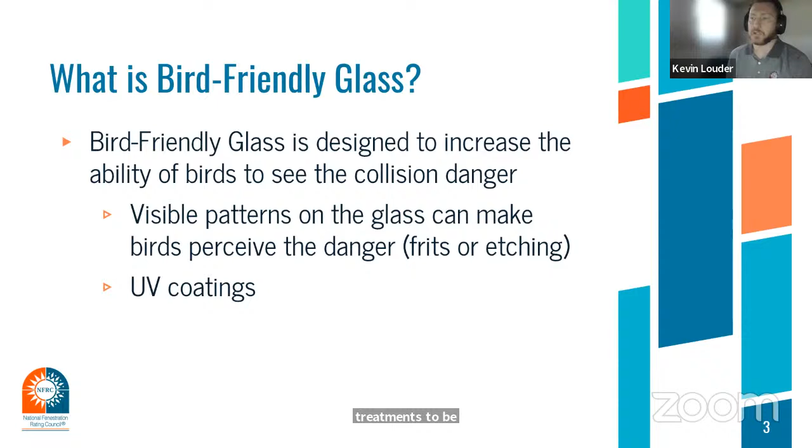As mentioned on the prior slide, patterns on the glass which birds perceive as not passable are avoided. Historical studies show that most birds will not attempt to fly between two horizontal lines that are less than 2 inches apart or between two vertical lines that are 4 inches apart. These studies focused on larger migratory birds, and smaller birds need tighter spacing, so 2x2 is becoming more popular, and I think this will be touched on later on in these presentations.

These objectives can be achieved using visible and invisible markings. Again, the invisible markings meaning UV applications. Common visible markings are created, again, using frit or etchings, obscuring the glass. Typically, the wider the lines or denser the patterns, the more effective they are.

For the UV markings applied to the glass, similar to the low-E process or other invisible or transparent coatings, the left-hand side shows what the bird sees. You can see that purplish hue with the striping. The right-hand side shows what the human eye can see. So the UV markings need to follow the 2x4 or 2x2 rules or other guidelines for visible markings to be the most effective.

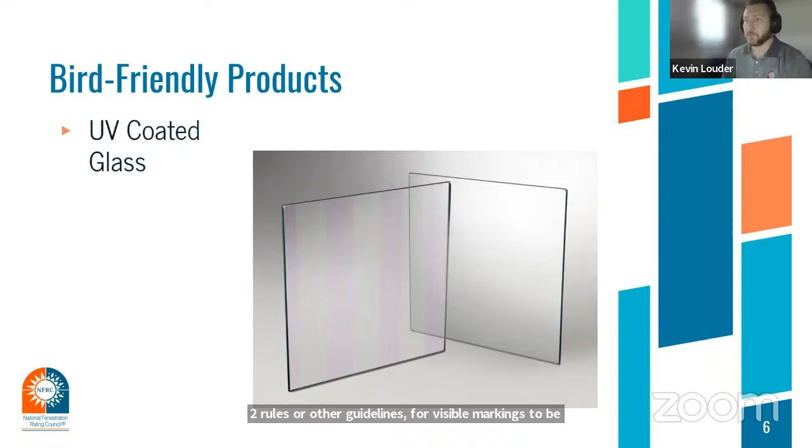The vast majority of glass is optically tested, measured, and added to what is called the International Glazing Database, which is managed by Lawrence Berkeley National Laboratory, also known as LBNL, and they incorporate that into their WINDOW software. This WINDOW software is used to assemble insulated glass units and calculate center-of-glass properties, which in turn is used for total product rating. In some cases, optical properties can't be measured directly, which requires the center-of-glass properties to be determined through other methods, which we'll talk about in the next slide.

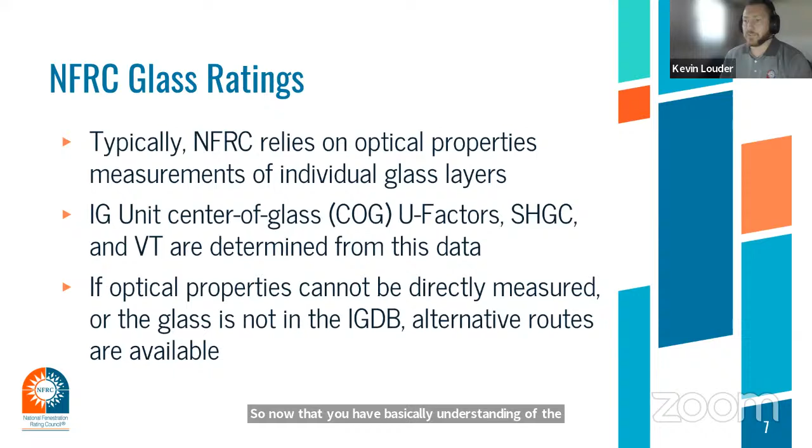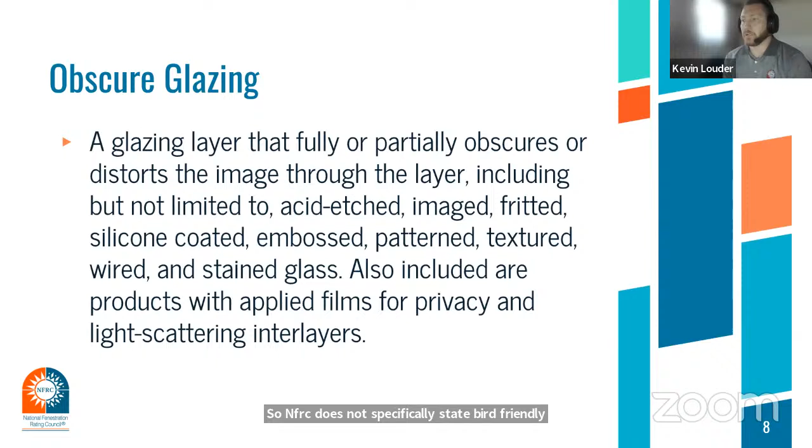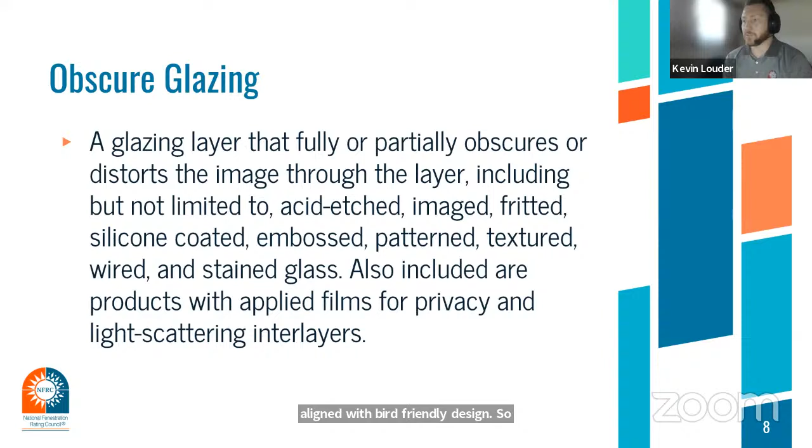So now that you have a basic understanding of the types of bird-friendly glass treatments and how NFRC rates glass, we can dive into how NFRC handles bird-friendly glazing. NFRC does not specifically state bird-friendly glazing, but visible patterns used would fall into an encompassing classification called obscure glazing. Some may also use the term diffuse glazing. As you can see in this NFRC definition, pulled from one of our technical documents, there are a variety of treatments covered and aligned with bird-friendly design. Now that we know these bird-friendly designs and glazing treatments are products and effects covered under the NFRC certification program, let me address the options that have been authorized for these glazing types.

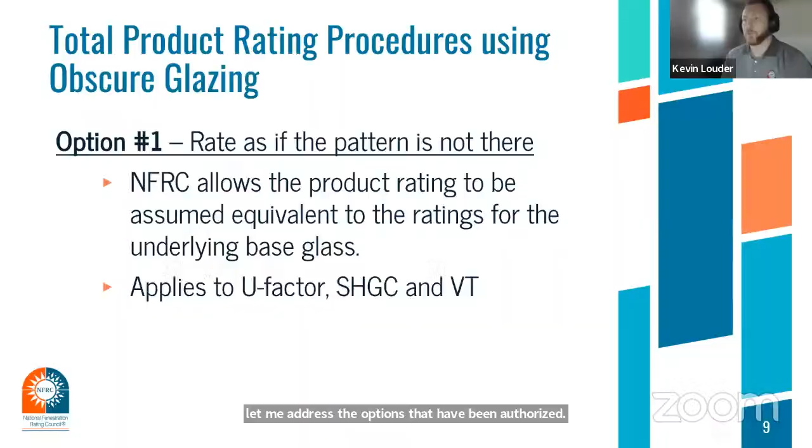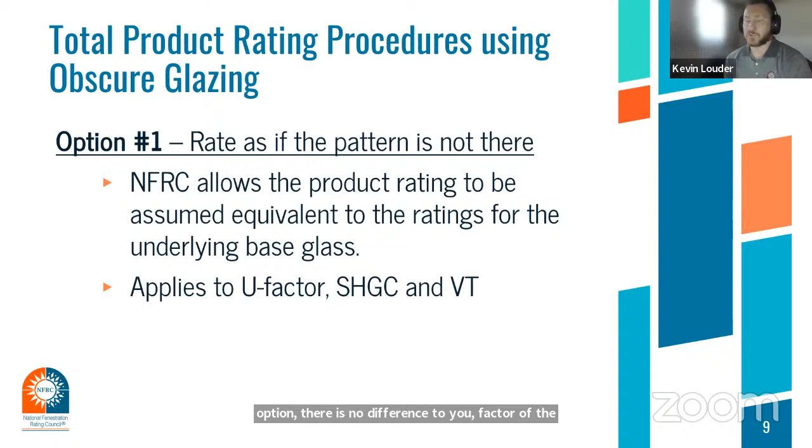Starting with the first option, it allows for the obscure treatment to be ignored, and the base glazing without the treatment can be used in the total product rating. This has been the path historically chosen, as it is the conservative approach. It's the easiest and most cost-effective path for the manufacturer. However, it's understood that the potential performance related to solar heating and VT due to the patterning is not captured when using this option. There is no difference to U-factor of the glazing with or without a tint, obscure, or diffuse treatment unless the treatment causes an emissivity change.

Moving on to option 2. This second option has not historically been widely chosen, primarily due to the cost to manufacture the samples and the time for testing, and it requires individual testing of all product configurations of interest.

Depending on the method selected, such as a total product test, meaning the entire glazing and framing complete product, this rating can only be used with that specific product configuration and glazing that was evaluated. Normally the glazing can be tested independently, which is desired and most cost-effective, and the results can be applied to any other framing. But again, all patterning configurations require independent tests.

So again, it can be very costly for the manufacturer to do physical testing. Since the U factor is equivalent with and without the obscure treatment, as noted in option 1, and physical testing for visible transmittance of pattern and frit glass is not available, typically only a solar heat gain test would be performed, which is our NFRC 201 test. If necessary, a U factor test could be performed, which is an NFRC 102 test, but that would only be completed if the product cannot be simulated. This incurs additional costs, which is not cost friendly for the manufacturer.

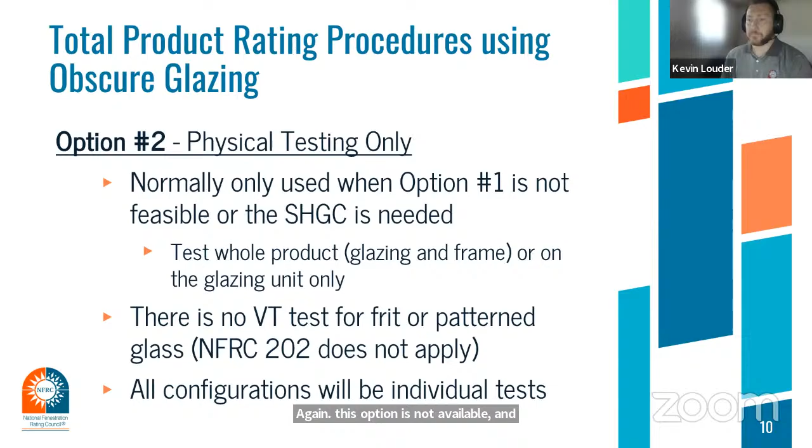All right, now for our final option. This is a new option that was just recently developed. For this final option, the NFRC 300 and 301 procedures are used, which use a spectrophotometer and an emissometer to measure the optical properties of the obscure glazing, also referred to as non-specular or diffuse glazing in these technical documents.

These procedures will allow for the full effects related to solar heat gain and VT of the obscure glazing, including all patterning and frit, through simulation methods once the optical data is available and input into the database, and that closely matches the current product certification for our normal specular glazing that we perform today. Please note that this procedure has only been approved within the last year from one of NFRC's funded research projects with our partner, Lawrence Berkeley National Laboratory.

Since this is a new process, no manufacturers have gone through this option, and a completed procedure is yet to be defined, including simulation manual procedures, approval of a diffuse module which would go into the WINDOW software, and other related simplification rules and procedures.

This option will incur significant upfront cost for a manufacturer to include all glazing options, which include glazing thicknesses, patterns, etchings, depths, etc., through optical testing, submission, and approval to the database. Again, at present there is no defined time frame when this option will be implemented or used.

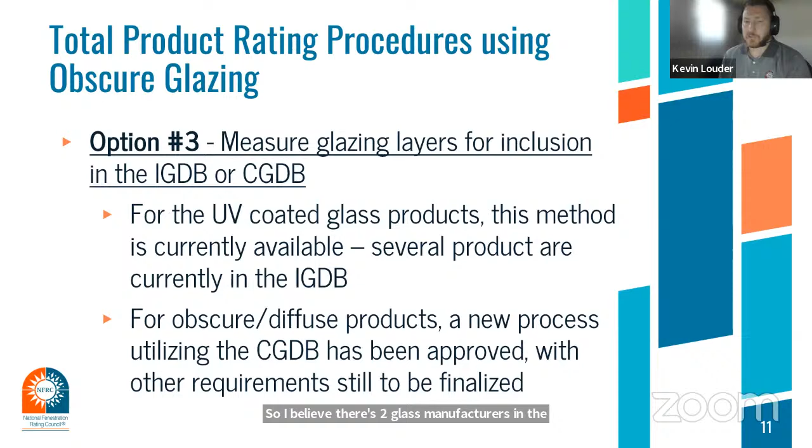All right, so to recap the options for obscure glazing, we have 2 rating procedures available today, but only 1 option projected—the 3rd option is projected for the future. Each option has an advantage or disadvantage for the manufacturer, but also a significant cost implication depending on the option used or required. From option 1, this is the most cost-friendly for the manufacturer. It's available in all of our certification programs, residential and commercial. It's the fastest to rate, but again it only provides that conservative rating. The solar gain and VT reductions which may be realized from that patterning are not accounted for with this option.

With option 2, it provides more detailed solar gain information, but the manufacturer can incur large costs for physical testing since all configurations of interest require separate testing, and that can cause a delay in product certification. This option only applies to the residential site-built program and does not apply to the CMA process. Also note that these physical tests that are performed do have expiration dates, so if these options are maintained in the product certification past the expiration date, they will have to be retested and recertified.

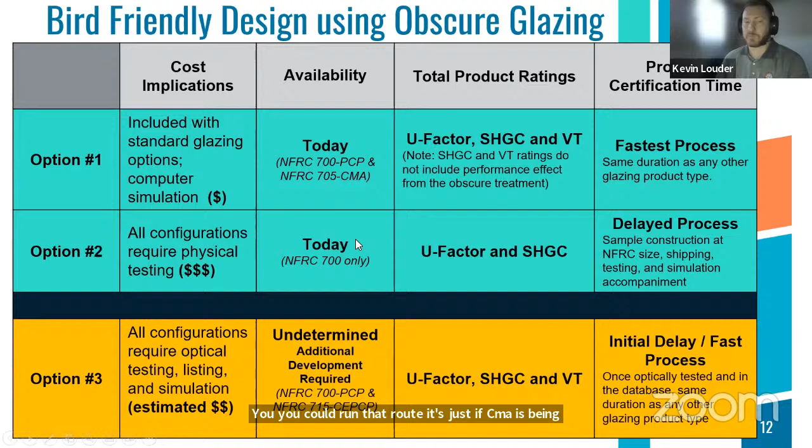If you use option 1, the 700 is our normal residential site-built program, and 705 is the commercial CMA. So if they use option 1, yes, that's applicable to both certification programs. When you try to dig into option 2, the physical testing, there's not an option in the CMA program. You could do a site-built, which is a commercial application - you could run that route. It's just that if CMA is being specified for the project, that application would not use this physical testing. That helps, thank you so much.

There are no more hands, but we do have one person on the phone if they wanted to comment. Anybody else have any comments? Anybody on the phone have any comments?

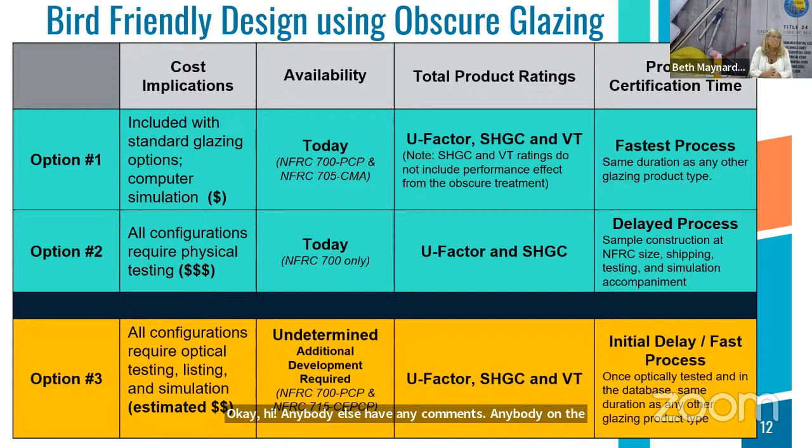Thank you, Beth. Appreciate it. You're welcome. Good job, Kevin. Do you need us to hang on any more, Beth, or? Unless anybody else has any more questions. No? Yeah, I'm good. Okay.

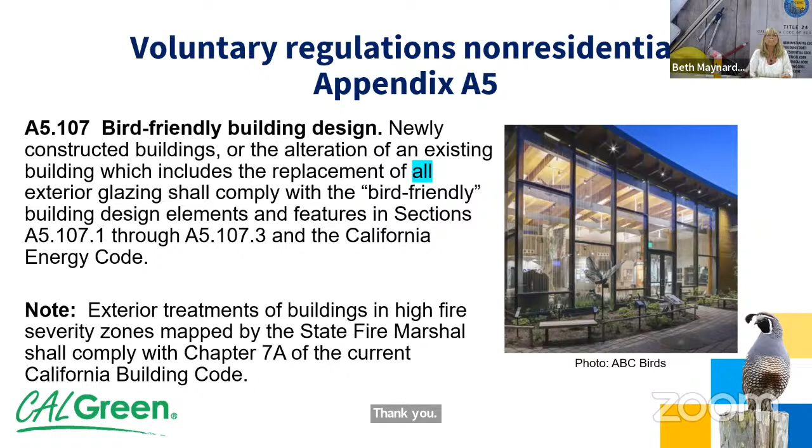Okay, the key critical area for birds is the first 40 feet above grade. Glazing applications to the first 40 feet are essential for a building to be considered bird friendly. These dimensions relate to typical city tree heights. This criterion is subject to the specific building design and site conditions.

For instance, if the site is too close to a natural area such as a ravine, woodlot, or other natural feature, where the majority of vegetation is generally higher than average, glass treatments in these areas should be applied to the height of the top of the surrounding tree canopy or the anticipated height of the surrounding vegetation at maturity. Similarly, for elevated landscapes such as podium gardens and green roofs, glass adjacent to or in the vicinity of these elements should be made bird friendly.

We did receive another comment on this, as far as required elevation treatment. Building elevation treatment shall incorporate bird-friendly mitigation strategies. No less than 90% of a building elevation, measured from grade to the height of 40 feet above grade, or from grade to the height of an adjacent mature tree canopy, whichever is greater, shall incorporate bird-friendly mitigation strategies. No less than 60% of building elevation from 40 feet above grade to the top of the building elevation shall incorporate bird-friendly mitigation strategies.

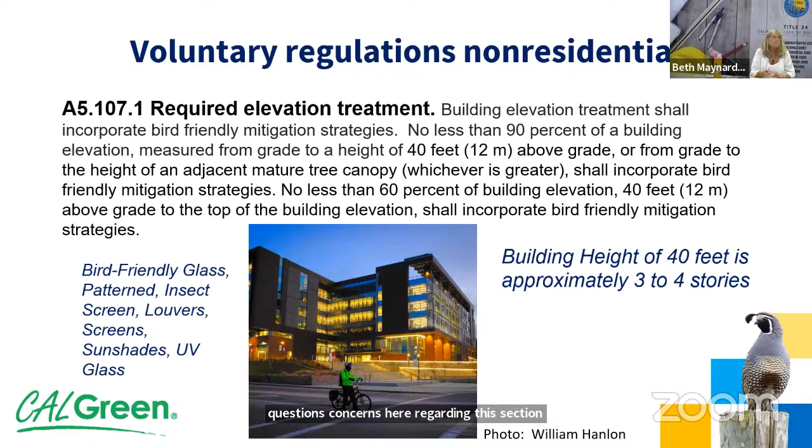Glazing with visual markers is most effective when the glass exterior fritted glass includes adhered ceramic lines, dots, or other patterns. Etching, fritting, and frosting not only reduce bird collisions but also reduce energy costs by reducing solar heat gain and reducing cooling loads. You can save energy and birds while still naturally lighting your building. Existing glass can be frosted using sandblasting.

So the next couple of slides have the 5 exceptions under the glazing. Required glazing elevation treatment strategies to minimize the risk of birds colliding with buildings. Glazing with visual markers shall include but not be limited to... oh, I gotta go back one. How do I go back?

So this was etched or fritted glass with patterns of elements on the exterior having minimum dimensions of 1/4 inch diameter for dots, 1/8 inch width for stripes, and a density of 2 inches maximum horizontally and vertically. Note: if visual markers are on glass surface 2, they can be effective if visible behind the exterior surface with reflectivity of 15% or less.

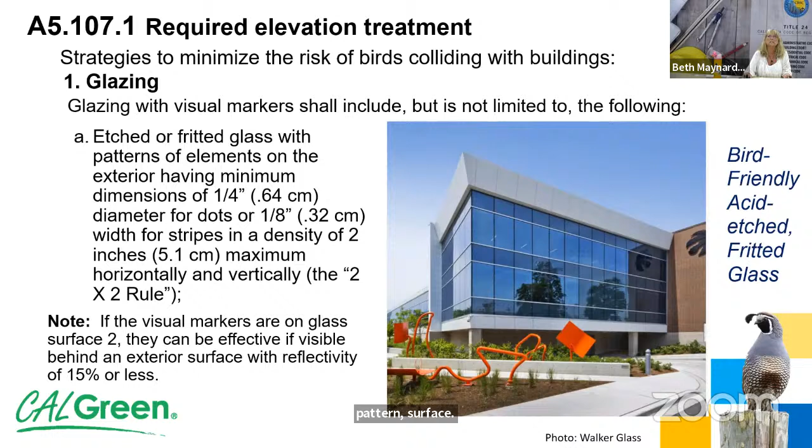Okay, continuing with glazing, we have interior or exterior glazing film with 2x2 visual markers, laminated glass with 2x2 visual markers, patterned ultraviolet coating, or the use of contrasting pattern UV absorbing and UV reflecting films. No low-E coating shall be behind the visual markers. Glass block or channel glass. Developed glazing technologies documented to reduce bird strikes as tested by an independent third party and approved by the authority having jurisdiction.

So we did get 2 comments on this. First commenter was Lance Davis, and his comment was: this all seems very restrictive. I personally like the threat factor ratings on glass. ABC and the National Glass Association like them too. Set a threat factor number and a height and allow design teams to determine how to achieve it. This allows more freedom, more product innovation, and keeps the requirements from being outdated once released.

Our second commenter, Dan Pizzelli, commented: interior films only okay if behind glass with exterior reflectivity of 15% or less. Does anybody else have any other comments, concerns?

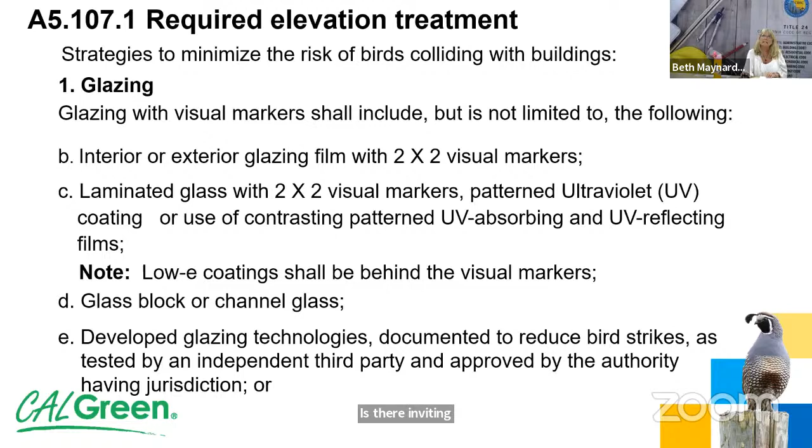I can actually get in touch with Lance and have him provide more information on that. I don't think there's a Lance Davis on, is there? I invited him. Yeah, I'll reach out to Lance and get information from him. Thank you. Thanks, Beth.

So these next few slides go through the exception provisions for slats, screens, netting, and louvers. Glass protected by exterior features that create a visible barrier in front of the glazing may include, but is not limited to, horizontal or vertical slats of 1/8 inch minimum face width, minimum 2 inch spacing, that obscure 85% of glass when viewed from all feasible angles. This is a picture of Langley Academy in Langley, England - glass assembly, louvers and sunshades.

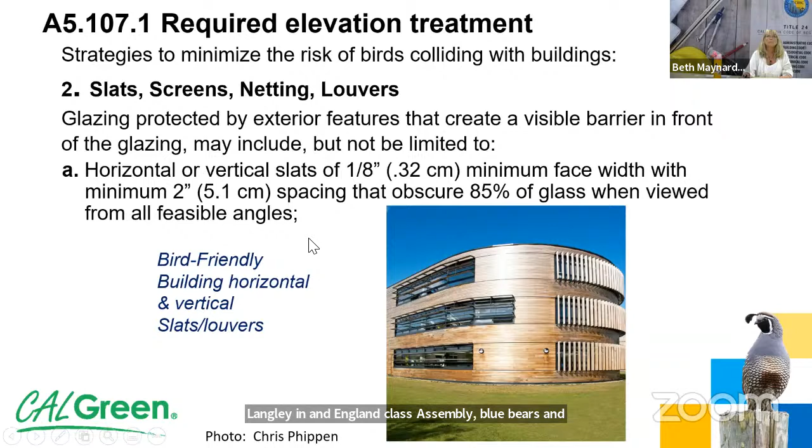Item B is grilles, screens, or 1/8 inch diameter welded wire mesh with openings no more than 2 inches maximum horizontally and vertically, installed parallel to and no more than 3 1/4 feet from the first surface of glass, glass surface 1. This is a picture of the Minneapolis Transit Center in Minneapolis, Minnesota, with screens, sunshades, and wire mesh openings.

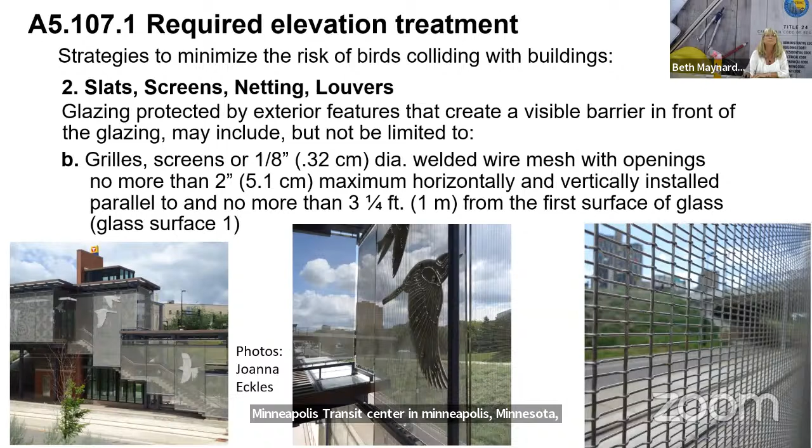Continuing with slats, screens, and louvers: netting with 1 inch maximum opening installed taut, at least 6 inches away from the first surface of glass. Netting is a simple solution for collisions, but it must be installed correctly and have a small mesh size. Pictured here is the Chicago Botanical Gardens in Chicago, Illinois.

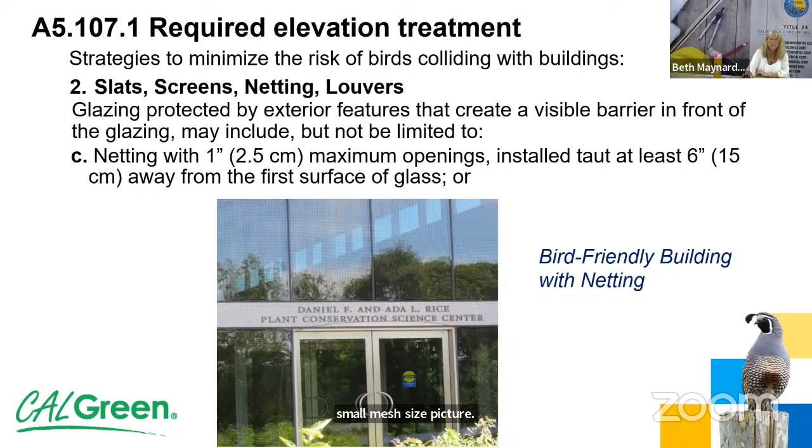I'll go through one more and then ask for any comments. Oh, Mia, you have your hand up?

I was just going to mention, I think the slat, screens, nettings, and louvers section is the primary reason why we include the note that you must comply with Chapter 7A in the building code, because these are the items Bob Raymer mentioned can cause collection of embers or trap things. So I wonder if we should move that note down underneath A5107. We can look at the regs as a whole - it's not a problem to have it right at the beginning, so the whole provision makes sure it doesn't conflict with 7A.

That's the last one. Okay, now we're going to go into special conditions. A5107-2 special conditions - the following special conditions shall comply with the provisions in section A5107.1 as appropriate. The first is a glass facade adjacent to a vegetated roof.

This is a photo of the botanical gardens. Did anybody else have any questions on the last one, A5107.1? I forgot to ask - anybody on the phone?

Okay, so continuing on with special conditions - although this picture is not a glass facade adjacent to a vegetated roof, it is a vegetated roof, so that's why I put it right here.

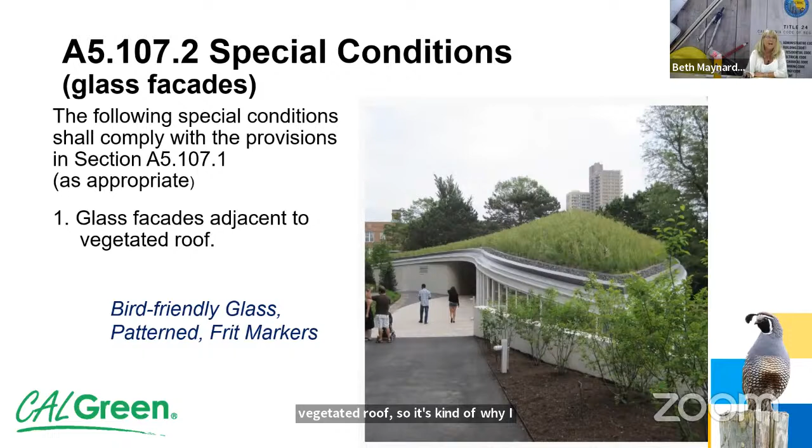The next set of special conditions are glass railings and guardrails. Railings of many types can be safe for birds - functional, decorative, and sometimes works of art.

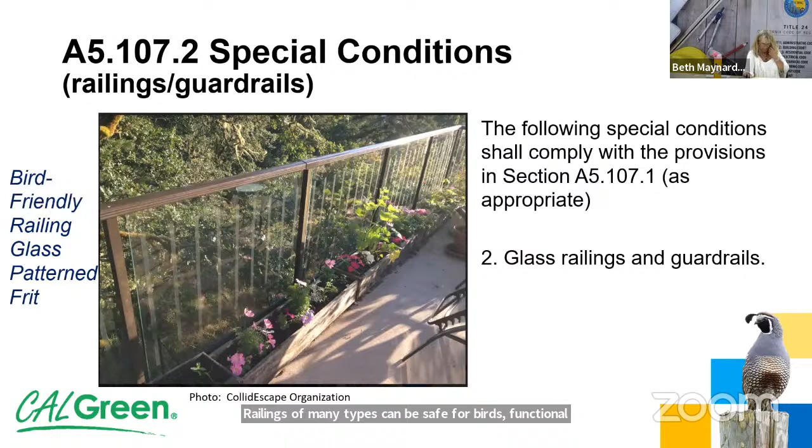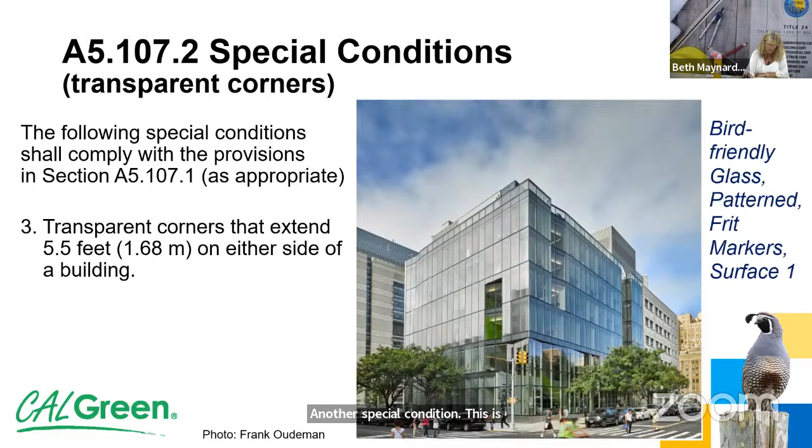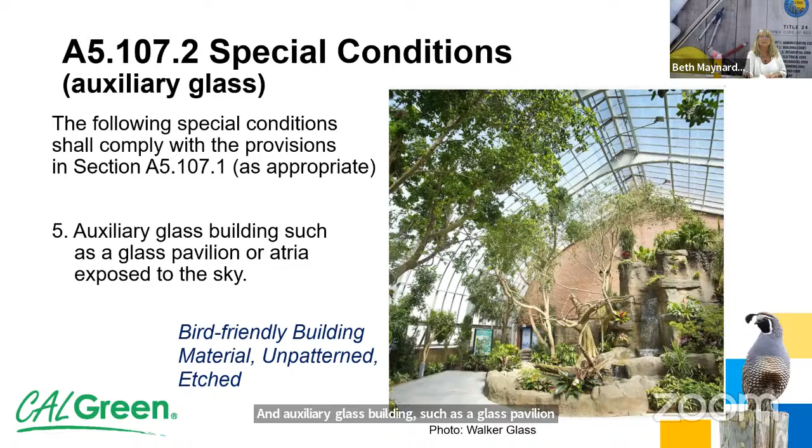And 4, glass passageways less than 5.5 feet wide, and auxiliary glass buildings such as a glass pavilion or atria exposed to the sky, or exposed to a courtyard, or with a water feature or plants. I think I remember Kevin talking about this - when birds see the plants inside, it attracts them to these kinds of conditions.

So does anybody have any comments, questions, or concerns on special conditions? Anybody on the phone?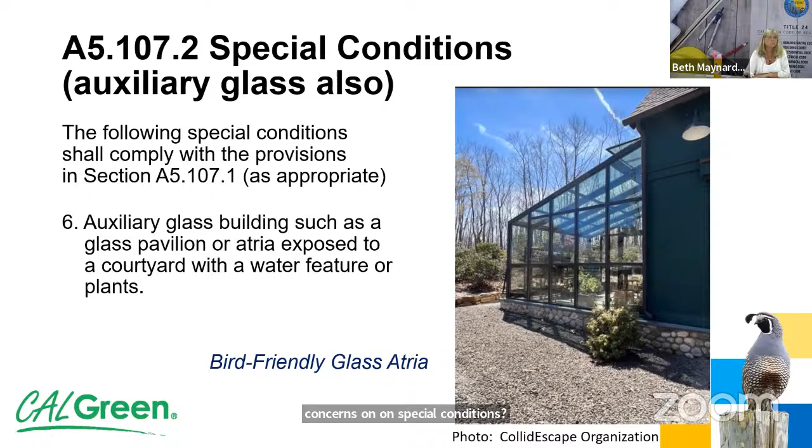Fatal light attraction results in bird death by collision. Low-flying, night migrating birds are known to be attracted to artificial light. Once attracted, birds become disoriented, and when large numbers of birds are present, multiple collisions between birds and human-built structures are possible. Night lighting attracts birds when cloud cover forces them to fly at lower altitudes during inclement weather.

We did get one comment on nighttime conditions, A5.107.3. Nighttime lighting at the top of the building and in the interior of all areas visible through exterior glazing, including lobby and atria, shall be controlled with a time switch control device or occupancy sensor complying with the current California Energy Code. The control device shall be programmed so the lights are extinguished from 2 a.m. to dawn, except emergency lighting and lighting required for nighttime security.

Dan Pizzilli had a comment: is there an exception for nighttime work? Some people, some industries work late through the night and need lights on.

Bob responded: I believe the CEC standards basically turn off the light when the program timer gets there, but you can get right up and turn it right back on. The point is, if there's nobody in the office, a whole bunch of them turn off. In CBI's office in the Esquire building, at 6 p.m. every day the lights go off, but if you need to turn it back on because you're working, you can. It does various programs throughout the night, so the CEC standards kind of take that into account.